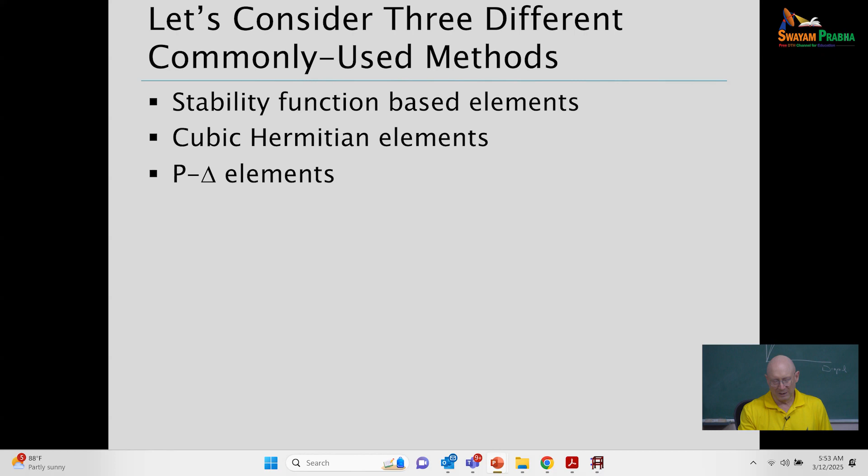So stability function element, what is it? Basically, in terms of the development, you set up the governing differential equations for a beam-column member. A typical stability function based solution is based on the assumptions that the response is elastic. It's typically done with a prismatic geometry of the member, Euler-Bernoulli kinematics, so no shear deformations, and plane sections remain plane and normal to the axis of the member. And we're considering finite displacements with the stability function based element.

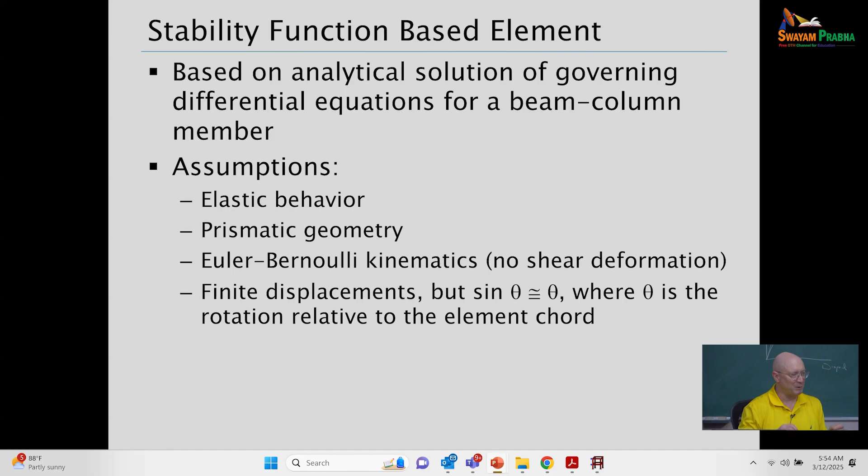But basically, if we're looking at a rotation, we're talking about a planar solution, so the discussion is mainly focused on planar analysis here. Some comments about 3D: if your rotation theta could be large in general, but the development is such that it's based on the assumption that sine theta equals theta, for a rotation of the element relative to its chord between its ends. There have been three-dimensional versions of stability function elements, but I think those are even more rare.

The plane frame analysis version typically starts with a matrix relationship that relates to axial force. That's just the axial shortening, P here is e times EA over L, our axial force - nothing special about that. But the other 2x2 parts relate to the moments, where we have stiffness coefficients EI over L. Notice the script L here, that's an element length. And we have coefficients SII or SIJ, and the equations for SII and SIJ are shown below.

How do we get those? Basically we're solving the governing differential equations of this problem based on Euler-Bernoulli beam theory elastic response. And with this, a term that is prominent within these coefficients, SII and SIJ, is often labeled KL, or sometimes written as kappa L. This lowercase k here is not an effective length factor - this is a different k.

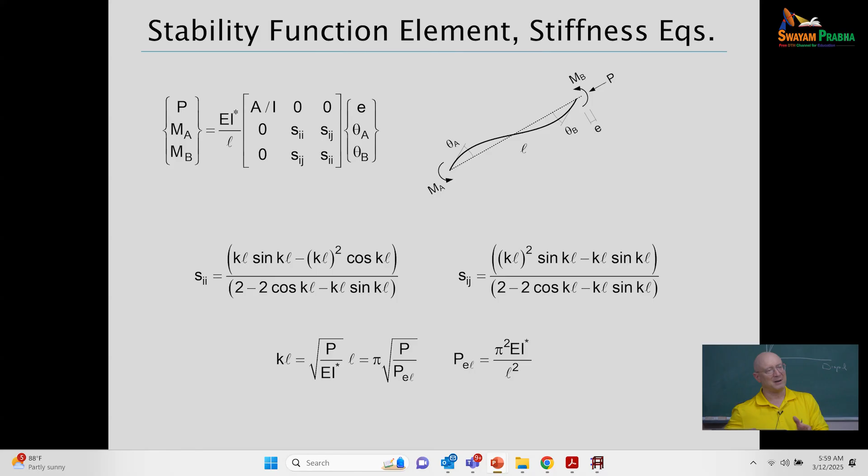There are similar things we can do that are a little more complicated, where we have essentially deformations E, theta A, and theta B, and I want to relate those to, if I go to the next slide, a general global, but in a local coordinate system tied to the current element orientation. What's the global rotation? What are the global axial and shear displacements at the ends? That's really just a kinematic analysis to get those relationships.

Those are very symbiotic. If I incorporate both the equilibrium relationships and the kinematic relationships that tie all these together, I get the 6x6, once I also account for the effect of P-large-delta that has to go in with all this. So that's a very hand-waving explanation of how we get from one to the other.

My approach here in this lecture is not to look at how we develop these elements and the details essential to that development. It's more about these being the elements we encounter as practicing engineers. How do we use them? How well do they work? How do we make sure they're working properly?

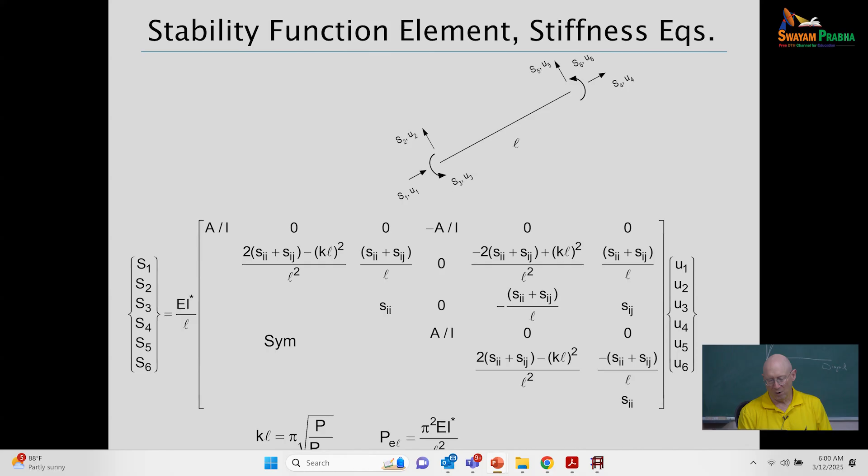Those coefficients I showed you a couple of slides back, Sii and Sij, depend on the axial load level. Let's take the most basic case: in the limit that the axial load approaches 0, Sii goes to 4 and Sij goes to 2. That's just the standard 4EI/L and 2EI/L that shows up with a linear elastic response of frame members. But as I increase the axial compression, those coefficients change.

What I'm showing you here is an example pointing to a location on the plot. The values of the stability functions are on the vertical axis, and the ratio of P to PE is on the horizontal axis. If I apply an axial load P equal to PE, P over PE equal to 1, the red curve goes to here, the blue curve goes to there, and interestingly, that's the point where those two curves cross.

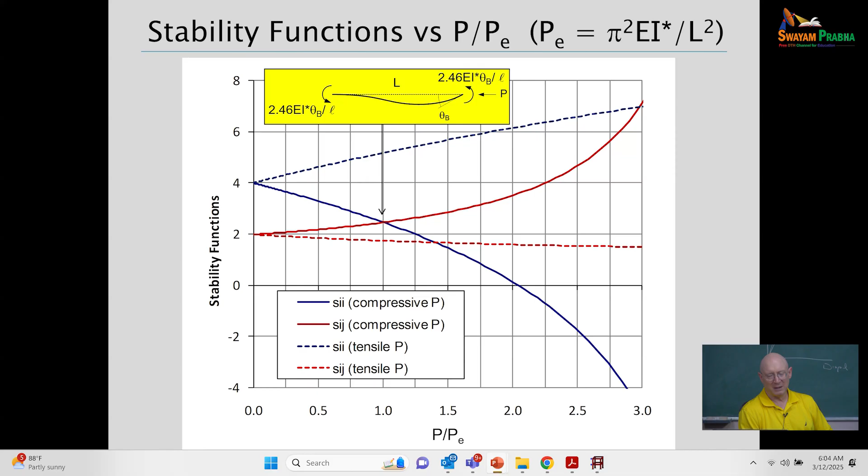Those blue and red curves are showing you how those coefficients are changing, and that's essentially a rigorous solution. It's a very accurate representation of what's going on, even with a single element for a member.

Now, cubic Hermitian, in this case, is a finite element based solution. The solution is achieved by starting out with a displacement function for the element. We represent the element response by a cubic displacement field along the length. The true analytical response from the differential equations is not cubic when we have axial force on there, so it's an approximation. But the whole mantra of finite elements is, okay, yeah, it's always an approximation, but if you use enough elements you get a good solution.

So the matrices we get, you get two matrices when using a cubic Hermitian element. The first matrix is what engineers often learn in a first matrix structural analysis class. Here I'm showing just the fifth column of the element matrix for KE. This is called the elastic stiffness of the element. The fifth column corresponds to a displacement of U5, so what are all the forces produced for a displacement of U5? If U5 is a unit displacement, this tells me I'll get shears of 12EI over L cubed, and end moments of 6EI over L squared. That's a fairly routine, basic result learned early on in matrix structural analysis.

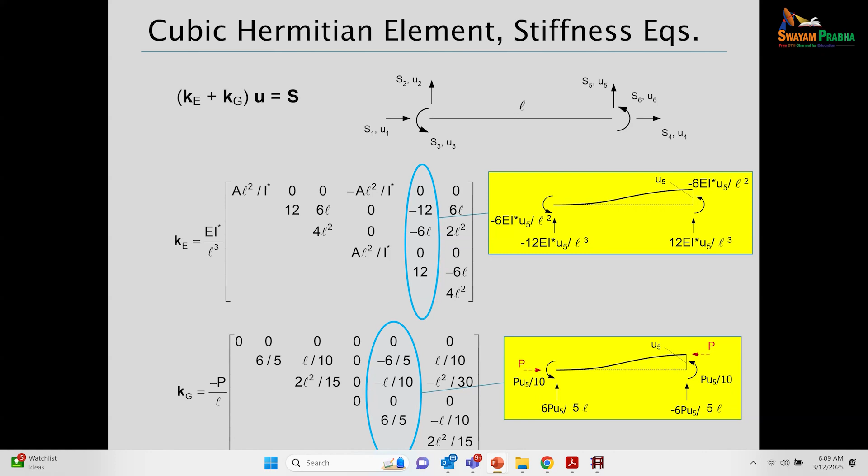You can consider the red dashed P arrow if you wish, or not. Do you have equilibrium? Let's sum moments about the left-hand end in that free body diagram. You have a clockwise moment of 6P times U5 over 5, and a counterclockwise moment of P over 10 times U5, and another one at the other end. You might say wait a minute, it's not in equilibrium. Oh, but yes it is, because if I have this displacement U5, the axial force location is shifting, so now I've got an extra moment of P times U5. If you include that in your statement of moment equilibrium about the left-hand end, you get zero. But that's equilibrium in the deflected geometry.

So that's what's going on with the geometric stiffness matrix here. This is representing both P-large-delta and P-small-delta effects at the element level via the cubic displacement approximation, which gives me some bending displacement relative to the chord.

The third element, P-large-delta, is basically the same elastic stiffness as what we just looked at, but we're going to use a different KG. I just realized as I'm saying this, I thought I fixed it here. Oh, we're good. You were good. I think in what you have and what I posted on the Google Drive, I'm circling the wrong columns.

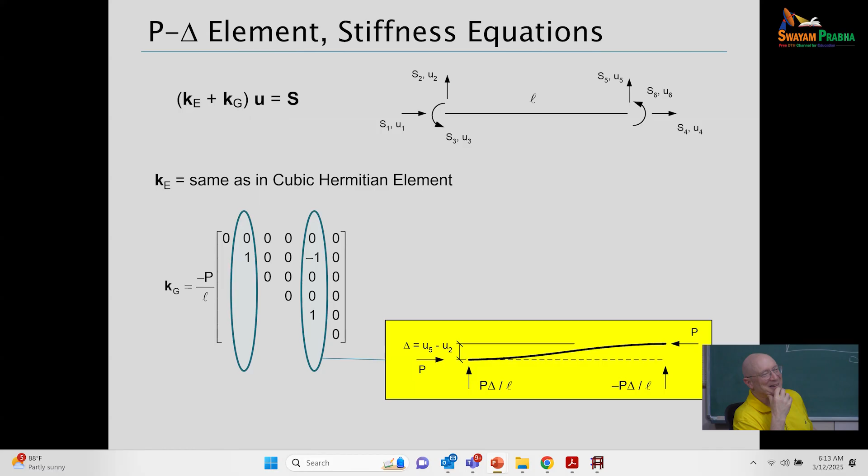Yes sir, in the Hermitian beam element, you said it will consider P-small-delta effects as well. It does consider P-small-delta.

So usually the displacement estimates at the nodes are accurate, and in between we are interpolating. Is it because the cubic function is able to capture the bending relative to the chord, so then you're getting some representation of the P-small-delta? But the internal loads like UDL and so on, it will be approximate, not correct, right?

Yeah, if you've got element loads on the interior, now there are other things going on. And for that, on the first day, I showed one recommended way that's a simple way to set it up if you're programming, if you're the software provider or developer. But there are many ways to do that to try to get an accurate estimate.

From what I've seen out there, at least when I look at what is displayed graphically, I don't see software providers doing anything other than a first order analysis approximation between the nodes, given what would be second order forces from the second order analysis at the nodes. But between the nodes they don't consider any P-small-delta term, they simply interpolate with the functions.

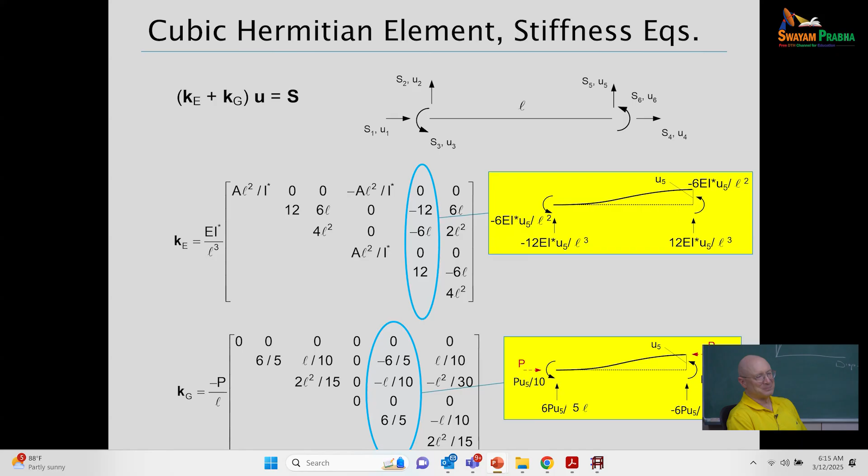Okay, so this problem is basically a cantilever. And things like a cantilever, or fixed in rotation, that's when we get the most bending relative to the chord, and so the largest P-small-delta effects.

So this example is a little bit elaborate. It involves a lateral load, a vertical load on the column. Again, everything here is in imperial units, and things are set up where the tau factor is essentially 1, but we've got a P over Py that's just starting to become slightly larger than 0.5.

So that's where the tau factor starts to become less than 1 in AISC. We've got a Pu over Pe, capital L for the length of this element, that's 0.15. A Pu over the elastic critical load for the cantilever is 4 times that, 0.6. We're showing this as a direct analysis method solution, so with a reduced stiffness.

So now, I'm not showing you the derivation of these equations, but if I go to theory of elastic stability and do a differential equation solution for this problem, I can derive exact moment amplification and displacement amplification formulas, and we can write those in terms of the quantity lowercase u that you see here.

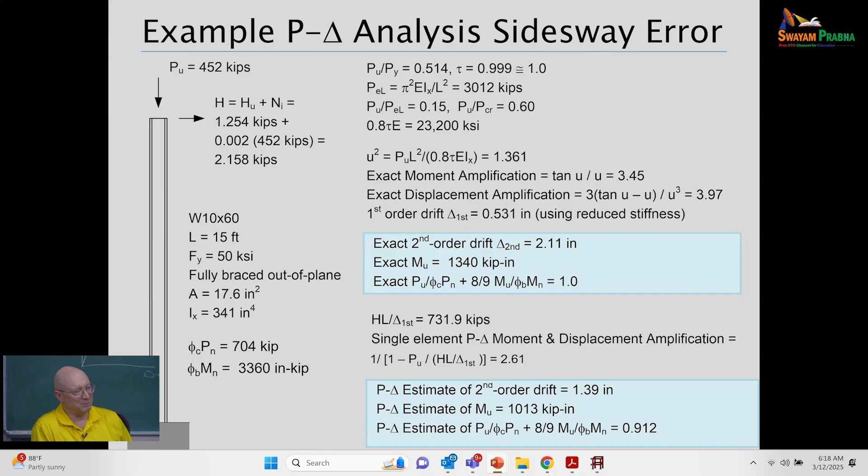All right, so now the next thing I'm showing you is, okay, what if we only do a P-large-delta analysis here? I'm making a statement here: if we calculate B2 that we looked at the development of yesterday, if we take RM, that factor - remember RM gives some effect of small delta on the large delta.

If we take that equal to 1, we've essentially not considered any P-small-delta on the large delta. It's a P-large-delta B2 approximation. So that's what I'm doing in the lines above the blue highlighted box. I'm saying if I calculate B2 for that, taking RM equal to 1, instead of a moment amplification of 3.45 and a displacement amplification of 3.97, I'm going to have a single amplification factor of 2.61.

Again, this is kind of an example. It shows up in the commentary to the AISC, and it's kind of an example, worst case, of where you have to consider P-small-delta. You can't just do a P-large-delta with a single element on this column.

But what's the ramifications of just doing P-large-delta here? That's what's in the bottom blue box. If we just apply the amplification factor of 2.61, we would get 1.39 for the drift, or for the lateral displacement. So our displacement would be off by 34%.

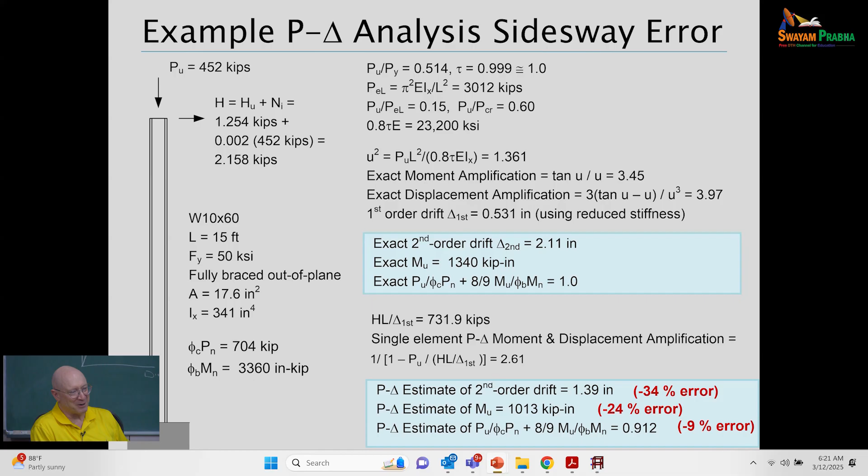So you can say, yeah, I want to do better than that, but the sky's not falling because I did a P-large-delta analysis. But that would be with just a single P-large-delta element for the entire length of the member, which is often what engineers may like to do.

It's a P-large-delta approximation, but you can see that at the element level, there's not much large delta. Or another way of looking at this is you could think of modeling the P-small-delta effects in any given member by a bar chain that's attached to the member.

With an axial load on it, and so the bar chain moves, and so I'm starting to get these destabilizing forces that get thrown into my member. If I use lengths of the bar chain that are very small compared to the length of the member, I'm still going to get a good solution.

So that's the key if you're using a code with P-large-delta elements: as long as you have enough elements, you're good.

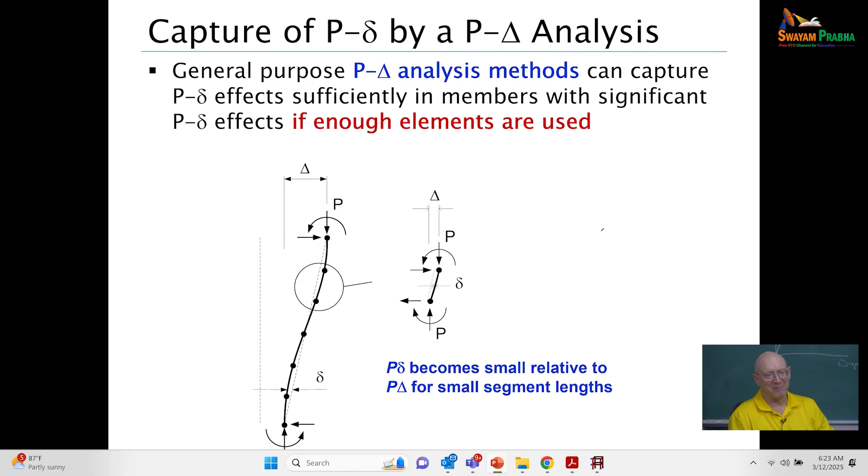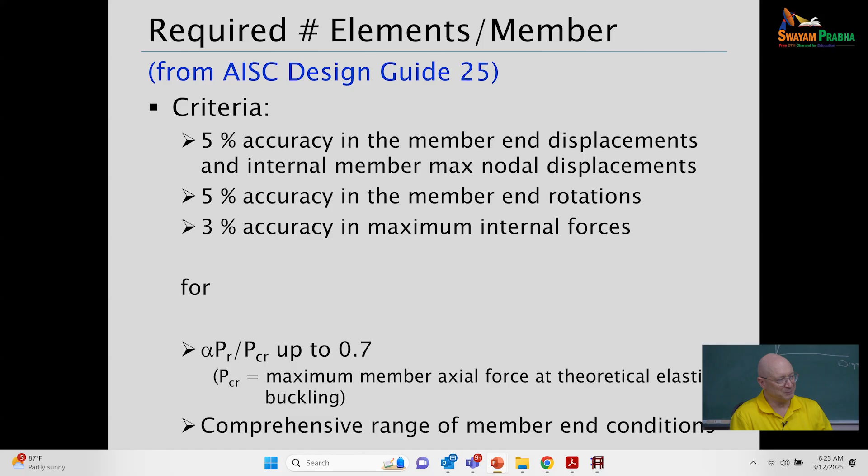So how many elements? Some recommendations I'll give you basically relate to aiming for design to get 5% accuracy in displacements and rotations, 3% accuracy in forces, for basically applied load levels at strength up to 70% of the elastic critical load. Usually we don't get any closer than that in a practical design.

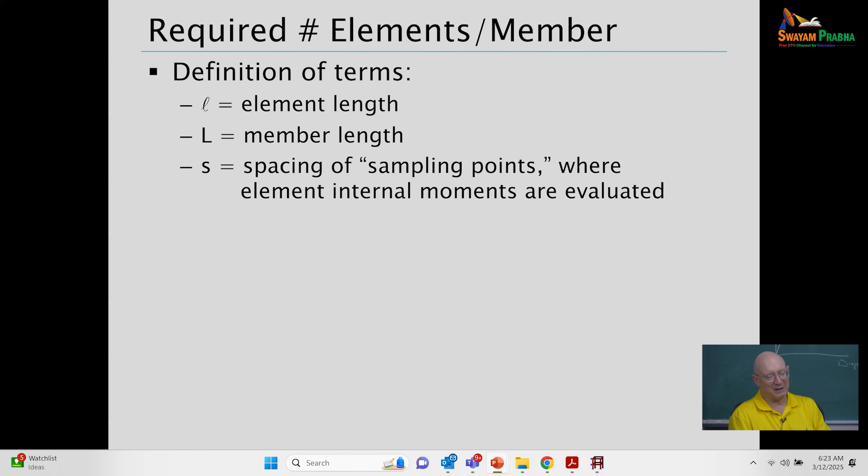And again, we're going to relate to things with different length terms still. So script L is element length, capital L is member length, S is the spacing between sampling points if we're going to try to sample and get internal moments between nodes.

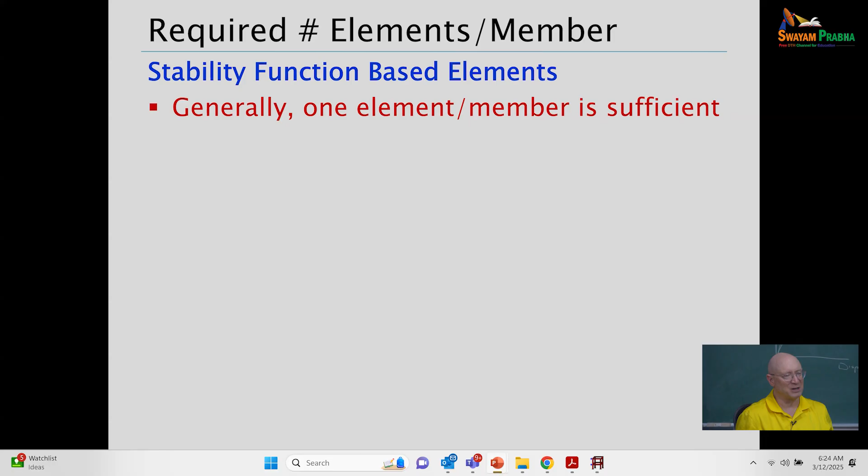But again, what goes along with that is, okay, so you used a very coarse discretization of your structure. If you have a case where the internal moments are larger than the end moments, we've got to deal with that in some way.

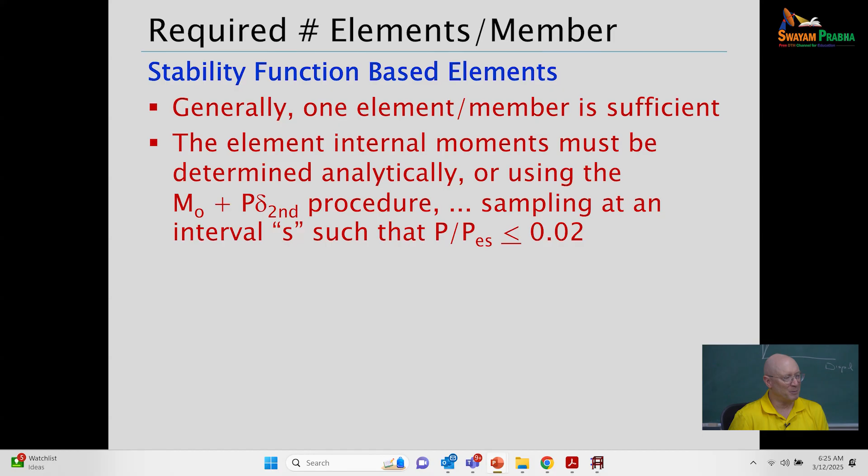And so I showed you a suggested way that a developer or a provider could implement something to get those moments. Or in design, we have this very coarse approximation of B1 that a few of us were talking about here, that we looked at the first day, that we apply at the element level to make sure we're covered.

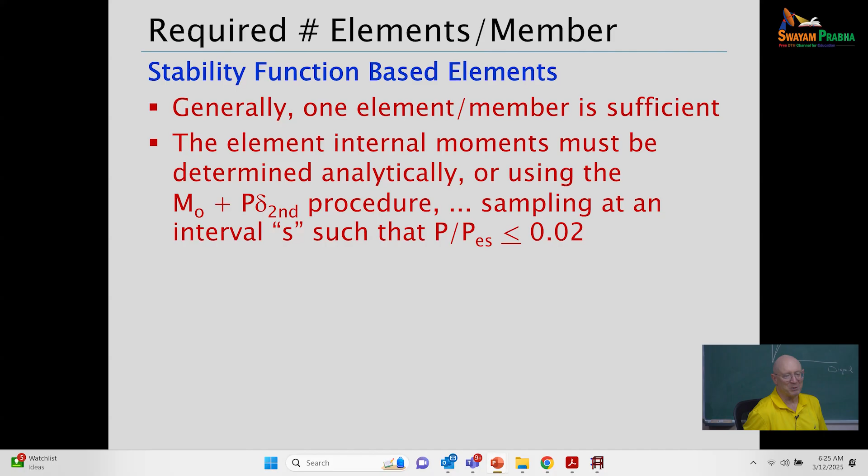Cubic displacement elements - Mastan is cubic, Fastrak, ETABS if you use the right menu options, GT-Strudl, LARSA, SAP, RAM elements, ConSteel. Those are at least a lot of the programs I'm familiar with that all have cubic displacement based elements in them, or cubic Hermitian elements.

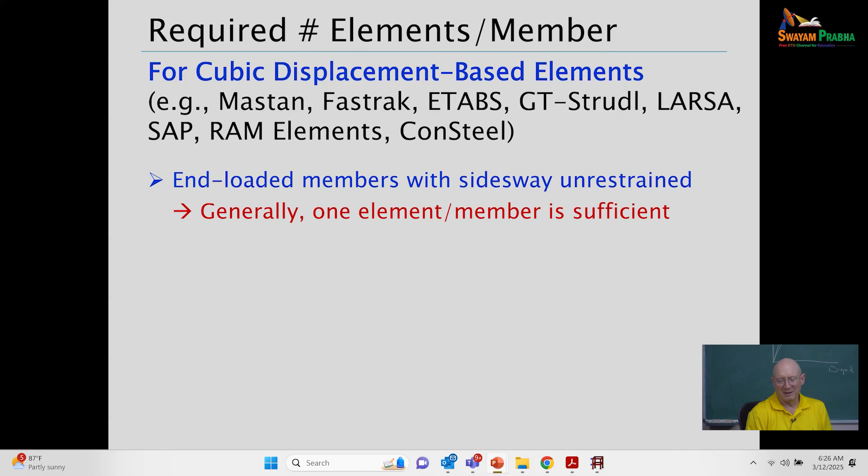So in this case, if you have something where you have a column, say, that has loads coming into it from the rest of the structure at its ends, but the rest of the structure really isn't doing much in terms of restraining this member's side sway - in fact, maybe it's destabilizing the member - and so the member is kind of on its own for the most part in terms of resisting side sway, then one element is good enough.

If you've got a case where, for whatever reason, the other parts of the structural system may be helping this member by helping to resist its wanting to sway to the side, then it's wise, if you are getting any sense of that, to use two elements to capture your P-small-delta effects accurately.

Well, that's pretty coarse, just two elements. But even there, if the axial load level P over PE-capital-L is less than 0.17, one element generally is going to work just fine. Again, the caveat is to avoid the need to have to do something to capture internal second order moments between the nodes and get an approximation there.

Okay, well, we would just use a P over PE-script-L equal to or less than or equal to 0.02, and that same goes with the stability function based element as well. If you use an element discretization such that P over PE-script-L is less than or equal to 0.02, you should be good with a global solution.

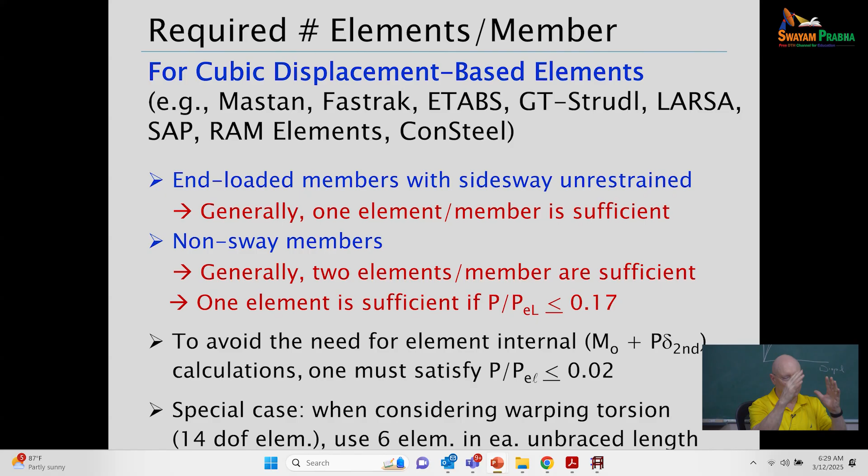...either a planar solution that buckles out of plane, or a spatially loaded member - the recommendation is you really should use at least 6 elements in each unbraced length. In between every position where you've got a member connected to other stuff, I would use 6 elements.

Okay, what about P-large-delta? I think there's often confusion thinking about recommendations for cubic elements, but P-large-delta elements generally require a much denser mesh.

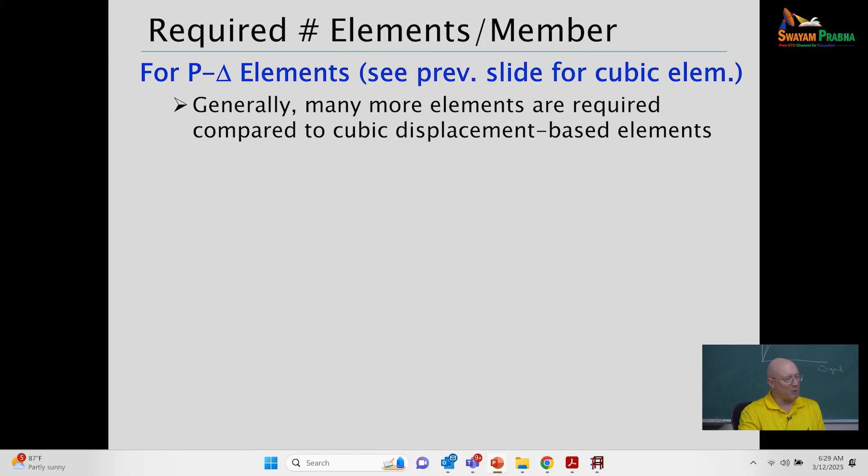The simplest rule that works very well is use P over PE-script-L less than or equal to 0.02 again for this, for P-large-delta. If you do that, you're essentially assured that you've got enough elements. So what does that imply in general?

As an example, suppose we've got 4 equal length elements representing a beam column, and say P over PE-script-L is equal to 0.02. Well, that means I can handle a P over PE-capital-L of 0.32, that's 0.02 times 4 squared, right?

Or let's say I'm using 8 equal length elements with P over PE-script-L of 0.02. Well, 0.02 times 8 squared is 1.28. So I can get a solution there. I'm confident I've got an accurate solution in that case. If I've got loading that exceeds PE-capital-L up to 1.28, I should be accurate with 8 elements.

Now you could even go larger, but I think you can't get any further. Well, if you keep pushing this, you say, what's the worst I could possibly have? Well, that would be needing to handle a P over PE-capital-L of 4. So that would take quite a large number of...

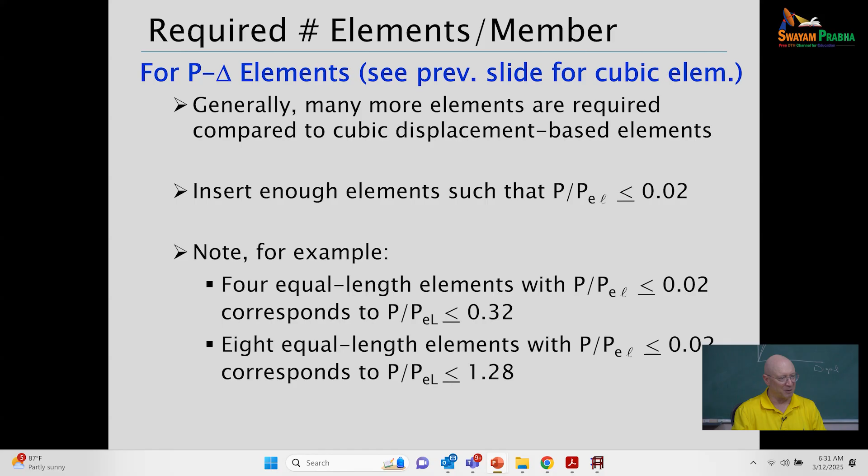There's one other thing to show you that is something that Dr. Shankar Nair essentially brought to the committees at AISC, and we put into the commentary of the specification. Let's consider typical steel buildings - Shankar would say that generally the ratio of your axial load taken by moment frame columns to your axial load in the story that's taken by the entire story, usually that's going to be less than one-third.

Where would he have a design with a steel framing where this is larger than 1/3? Why? Moment connections are expensive, and you're typically going to have a lot of your floor framing connections to your columns as basically web type connections that don't transfer significant moment. We idealize these as pins for the analysis.

So if you have PMF over P story less than or equal to 1/3, and if B2 is less than or equal to 1.7, then you can basically argue that your error in neglecting P small delta effects on the large delta is generally less than 4%.

Now we can show a derivation of that by using our equations that we discussed yesterday for B2. So we have the RM factor in that equation. If PMF over P story is 1/3, then RM would be 0.95. So now let's calculate B2, but let's calculate it without an RM. That means we're basically doing a B2 that's just handling P large delta.

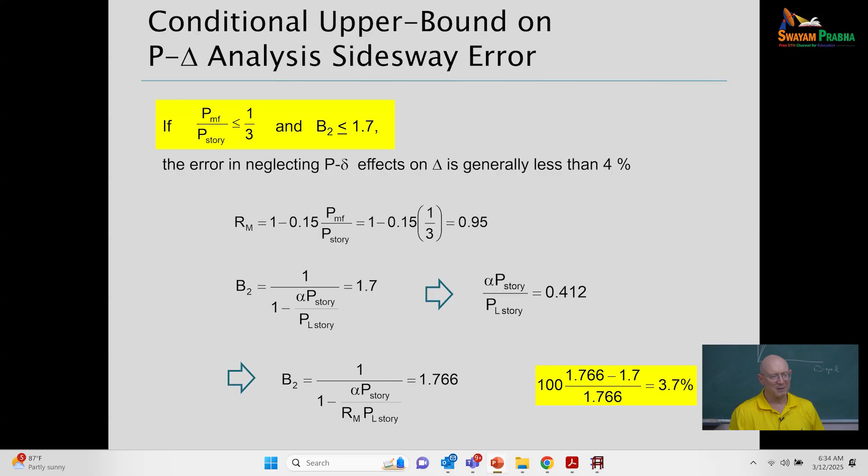So Shankar would say he doesn't have a problem using RISA and getting his drift and his overall lateral moments in a frame based on P large delta in RISA. And then if he has a situation where he needs to check non-sway moments and non-sway B1 or P small delta amplification, back to this, but with that being on the total length of the member L, where he's just doing a P large delta analysis with one element for every column in the frame, and he would show this and say that there's no problem with that.

He may have a conservative estimate with this way of applying B1, but so be it. For most steel building frames, the B1 factor is often 1 anyway, and is not much larger than 1 in most situations.

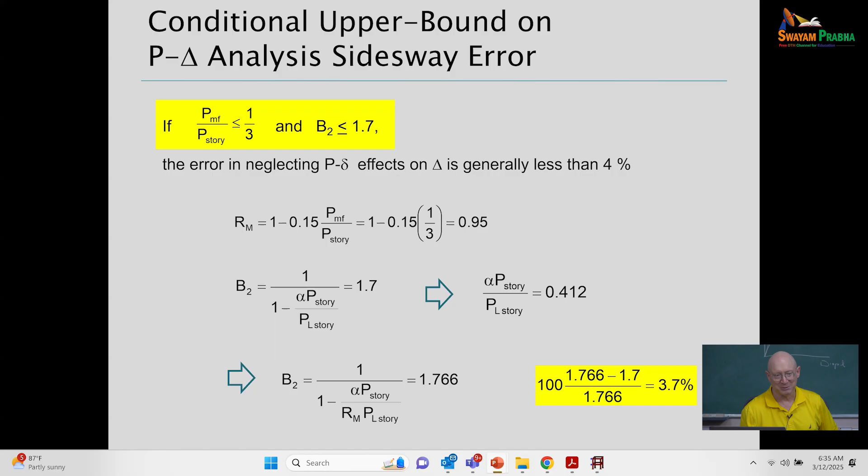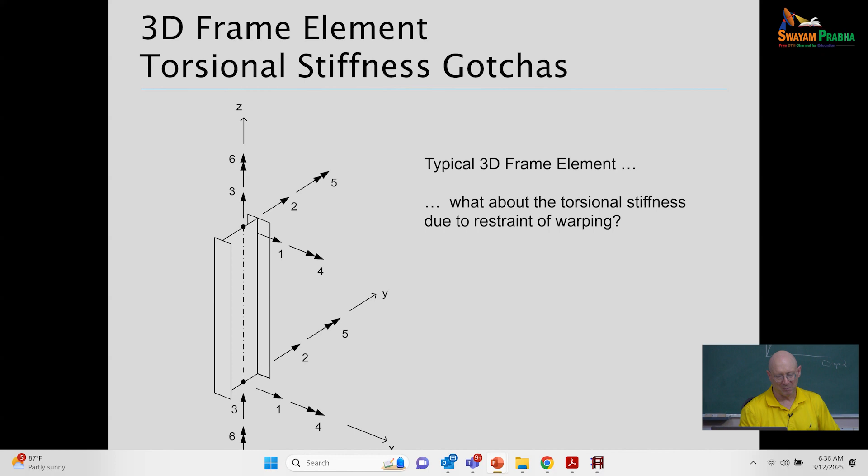Last thing I want to highlight is if looking at three-dimensional analysis, we can have a 3D frame element, and in software like Consteel, we have a 7th degree of freedom at each end of this element rather than just the 3 translations and 3 rotations. So what's the importance of that? This is a little first order analysis example to try to highlight the importance of that 7th degree of freedom at each node, which basically allows us to model warping in the frame solutions.

Now, what's warping? Warping in an I-section member is essentially cross-bending of the flanges. So if we take this simple example of a cantilever beam, built in where everything is fully fixed on the left-hand end, and then we apply a torque at the free end, let's twist it. If we look down on it from the top, what do we see? The top flange is being bent in one direction, the bottom flange in the other. Those two flanges are working like beams, right? That's the warping of the cross section, or the cross bending of the flanges here.

And that cross bending of the flanges is really the predominant resistance to twist in most I-section members. We also have the St. Venant torsion, but the St. Venant torsion is a relatively small contribution.

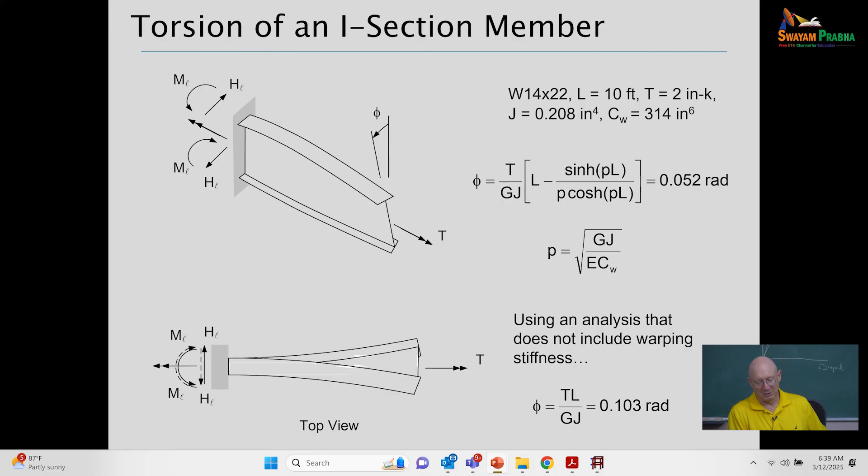If we neglected the cross bending of the flanges and just considered what we refer to as the uniform torsion or the St. Venant torsion within the member, then the twist would be equal to TL over GJ. The St. Venant torsion constant, capital J, is very small here. So my rotation is essentially double.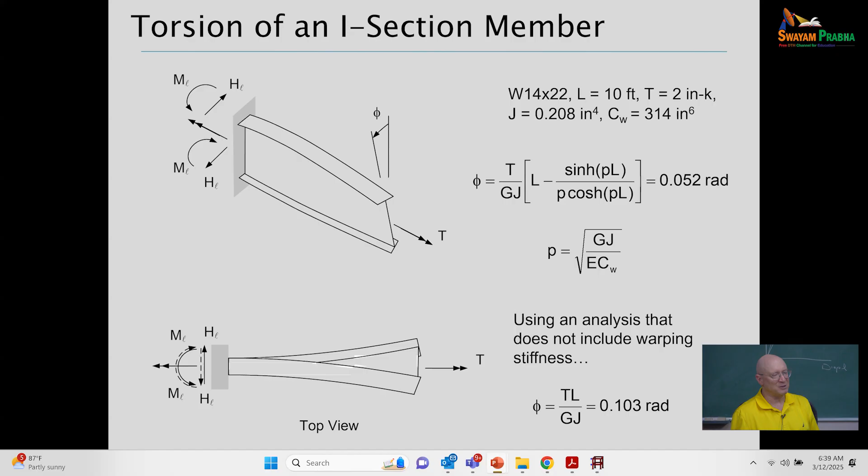So this is a very simplistic illustration using a first order analysis of warping rigidity, which is very important when it comes to twisting in these types of structures. That's one of the highlights of Consteel: everything in Consteel is based on including that warping.

One of my senior colleagues at Georgia Tech a few years back, essentially the principal with GT Strudel, was giving a seminar complaining about how the AISC spec was really bad because he had an engineer trying to design a boiler building, and GT Strudel was having a lot of trouble because he was designing into a range where GT Strudel was basically saying, hey, you got a big buckling problem here. A boiler building, if you're not familiar, is something where the building is basically housing a boiler on the interior. You have nowhere to brace your columns because there's a big boiler there, so you're supporting the boiler from the top of the building.

So you've got this very long unsupported length of your columns, at least in the direction in and out of the plane of the wall of the building. And that's basically a case where most software packages at present will not actually give you that seventh degree of freedom to give you a realistic representation of the torsional stiffness here. In a lot of designs it doesn't matter, because torsion is a minor player and members are relatively short before they're connected to other stuff. So ignorance is bliss, we don't notice that the torsion approximation is poor, and things are okay. But in a case like this, in that boiler building...

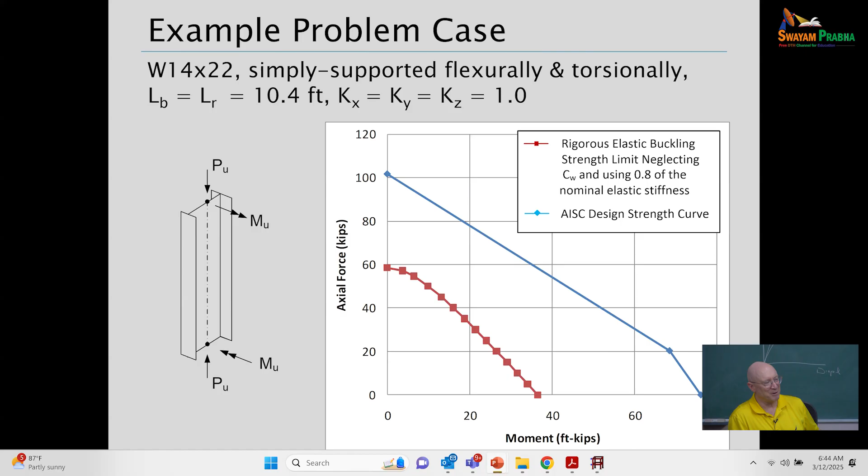So you set up and run your structural analysis, a 3D analysis. You look at this, and this member doesn't look too out of the ordinary. Then your analysis comes back failing, saying you've got significant elastic buckling of your members at a very low load. Why? Because you didn't include the warping.

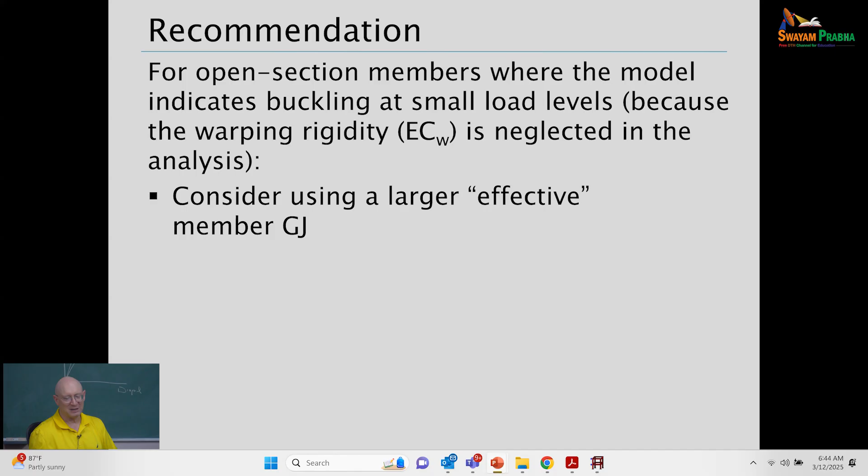So the recommendation in cases like this is that it's wise to consider using an effective member GJ that incorporates warping. Actually, RISA does this, where they have an option where the program is only using a GJ, but they derive an increase in GJ that accounts for the warping stiffness. So it's kind of a backdoor representation of warping that's approximate, but it keeps things out of trouble with problems like I just showed you.

This is also suggested in the steel bridge arena in the United States. I've been involved a lot with design of horizontally curved I-girder bridges. Well, in horizontally curved I-girder bridges, torsion is very important. It's an I-girder, and if you're going to do a grid analysis of such a bridge with just GJ over L, you're going to run into trouble sometimes, wondering why your deflections are so huge, because you don't have a good model.

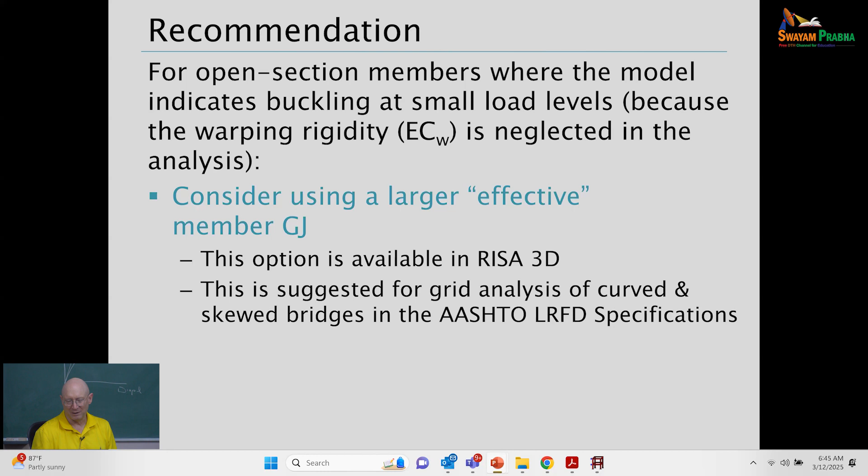So there are similar recommendations in the American AASHTO design standard for bridge construction that say, for grid analysis, you can use an equivalent GJ, a rough approach, but one that gets a reasonable solution. Or ideally, if the world had Consteel or other programs like that, the warping is included within the solution, and you've got something that can be used very naturally and very directly for any problem where you've got significant torsion on an I-section member.